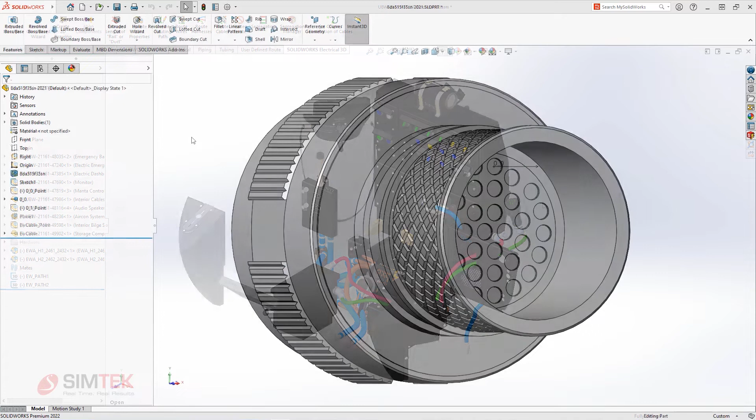When you go deeper into the beautiful unknown of the underwater world and rely on your power, oxygen, and navigation, electrical design plays a big role. In SOLIDWORKS, we bring multidiscipline engineering into one ecosystem. Creating electrical information for a SOLIDWORKS part does not need to be a long, drawn-out process.

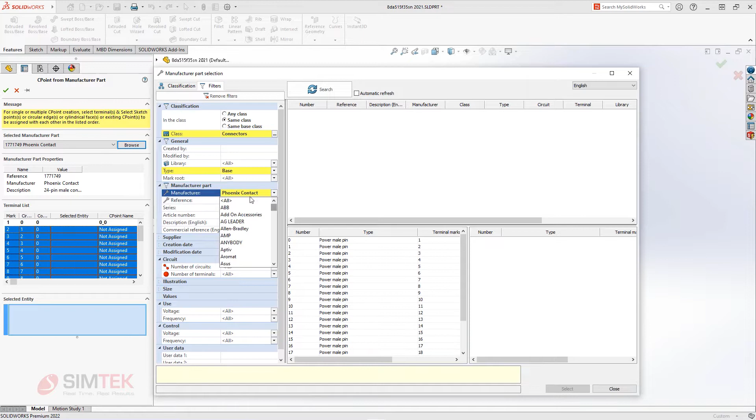Adding connection points in SOLIDWORKS became easier. They can be done inside SOLIDWORKS by going to Tools, SOLIDWORKS Electrical, where you can select Create CPoint from Manufacturer Part. In this dialog, it remembers the last manufacturer part that was used, or you can browse and select a different manufacturer part from an extensive library.

The terminal list shows the list of connection points that need to be added. Selecting a point or an edge in SOLIDWORKS updates the table, and selecting OK will add these terminals to the part.

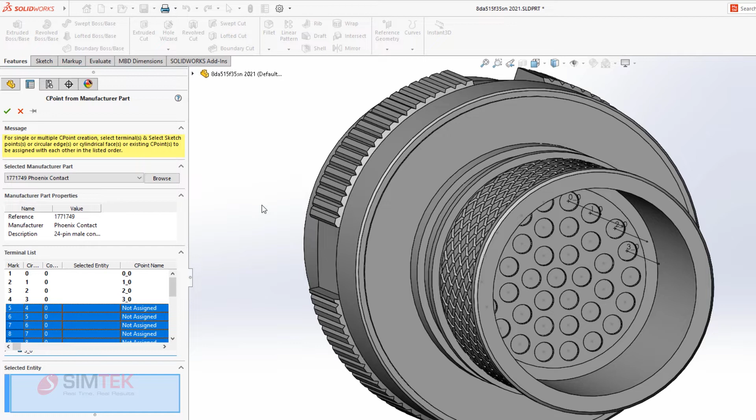Going back to Tools, SOLIDWORKS Electrical, Create CPoint from Manufacturer Part reveals what terminals already have been placed with the remaining list to do. The ability to select the point or an edge in SOLIDWORKS, to add the connection point with table updates, allows you to quickly create electrical components right in SOLIDWORKS. Less time creating parts and more time designing.

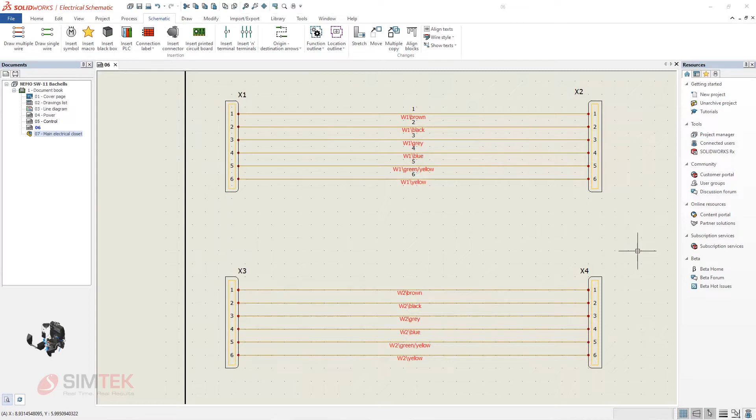How would you protect the junction between contacts and wires to eliminate electrical failures? Backshells are used, and SOLIDWORKS now supports them. Two harnesses from the battery to the control panel and external plug are created in SOLIDWORKS Electrical Schematic. In SOLIDWORKS, these two harnesses are routed. Now that the routes are in place, you can address the wires and contact protection.

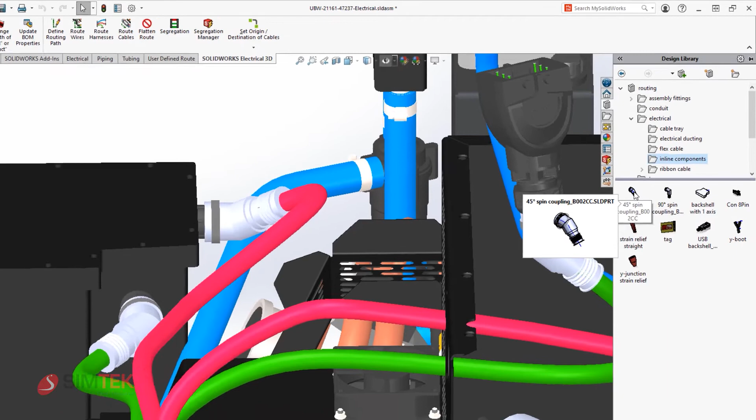Adding backshells to the connectors removes the stress between contacts and wires. Backshells are available in Design Library, Routing, Electrical, Inline Components. A 45-degree spin coupling was used and mated to the connectors. One more connector with a backshell will need an adjustment of the harness to go through the backshell.

Edit the harness that is in red and select the body of the backshell. From the right mouse button, choose Edit Route Alignment. Select the spline of the harness and then the axis of the backshell. Efficient use of backshells during design will protect the junction between contacts and wires, eliminating downstream manufacturing delays and costly redesigns.

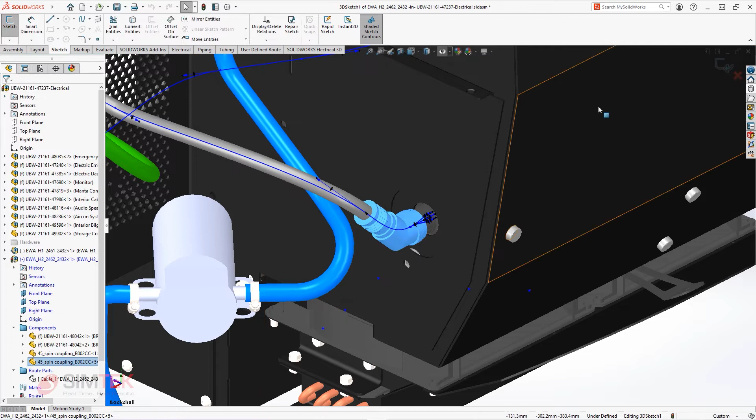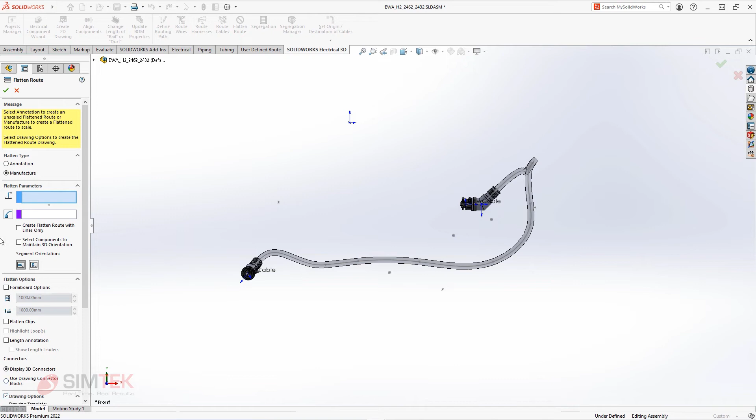Creating harness drawings and tables manually takes time and can be error-prone. Flatten Route in SOLIDWORKS automates this process and now supports backshells. Flattening this red harness will include backshells along with the harness and connectors in its 3D position, and will show them in appropriate locations. In the Flatten Route dialog, choose what detail of documentation you will need to include, like manufacturer, display 3D connectors, and checkmark for drawing options.

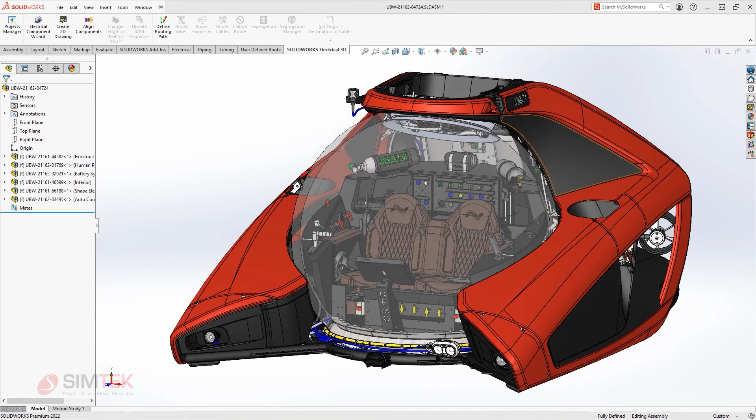Choosing OK does produce the harness drawing with connectors, backshells, tables, and callouts automatically, and saves time for engineers to tackle other technical challenges. The SOLIDWORKS ecosystem lets you quickly create electrical information for components, add and manipulate backshells for contact and wire protection, and create flattened harness drawings that include backshells.